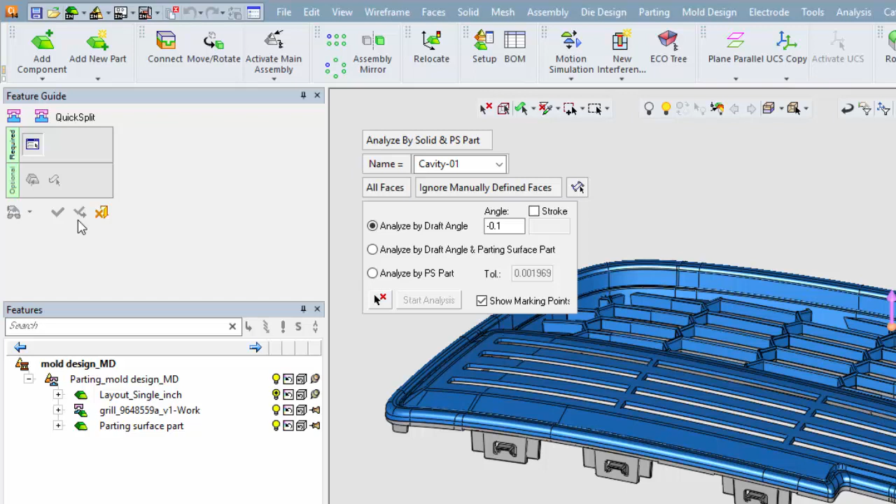Here we will select our first pull direction. We will give it the appropriate name, and then we will pick a face that we know lies within that pull direction. By default, it selects the active Z-positive direction for the pull direction, but we could pick another if we needed it. Now all the faces that it sees in that direction are placed on the cavity.

Here's our first glimpse at the slide bar, which dynamically will separate all the pull directions we create. And please notice the nice clean separation that it makes along parting line.

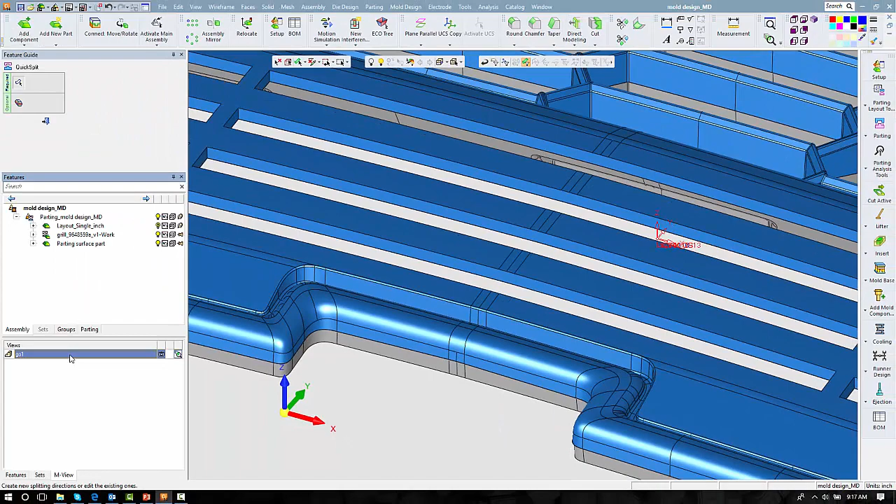Let's now create the core split. We will pick the appropriate name, in this case core, and then we'll tell the system to pick only those faces which have not yet been assigned. Then we pick a single surface that we know faces that pull direction. Now we make sure that our direction vector is pointing in the Z negative direction or the core pull direction.

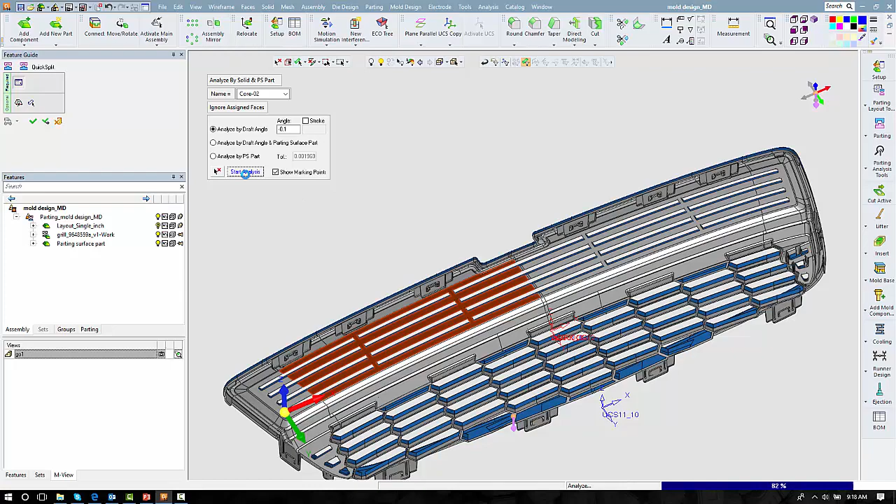So now the core surfaces are identified, and we see in yellow anything that is at least partially undercut or trapped between the two pull directions. We will accept the core faces now. The yellow faces will remain unassigned since they're trapped.

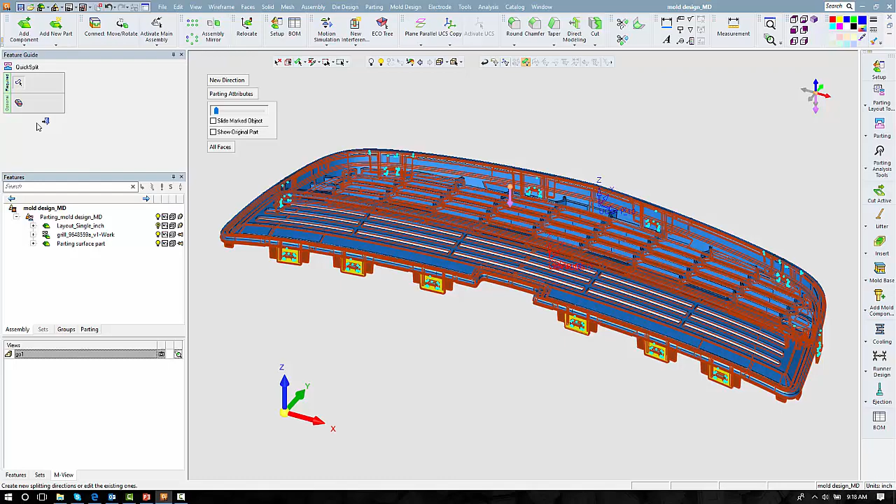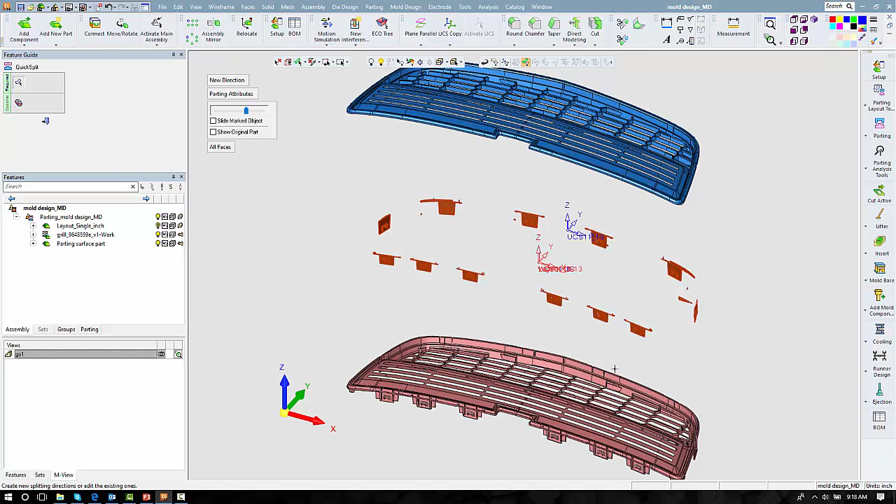And again, using our dynamic sliding bar, we can see, by separating cavity and core, which faces have yet to be assigned. The ability is there to place these remaining unassigned faces on a separate pull direction if we so desire. In this case, we're simply going to attach them manually to the core faces and let the lifters take care of them. And that is done by simply middle mouse clicking over the core faces.

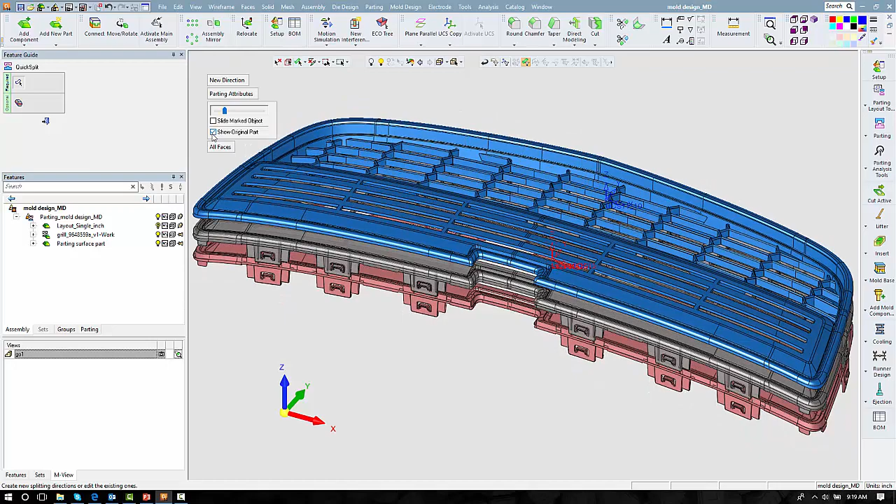Another nice feature is to display the entire part while the different split directions are separated. Another important option to quick split is the ability to analyze faces based upon their draft angle. These draft angles are displayed based upon a range of angles and colors that we can fully customize.

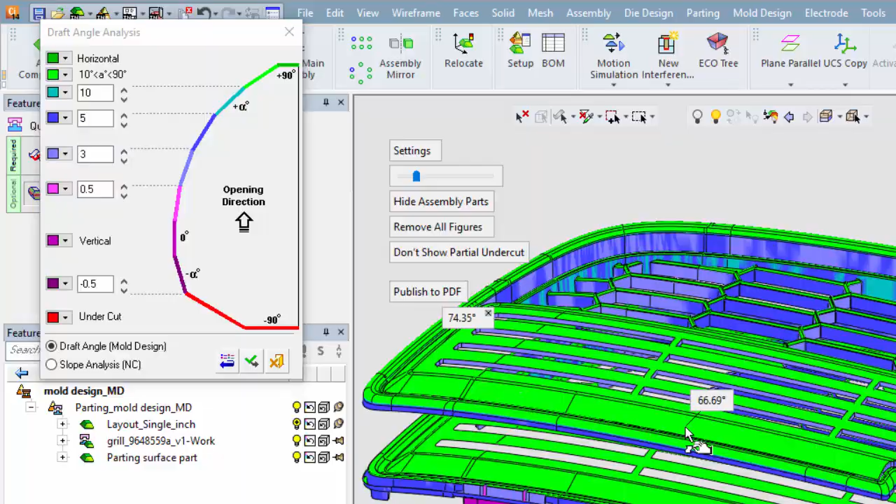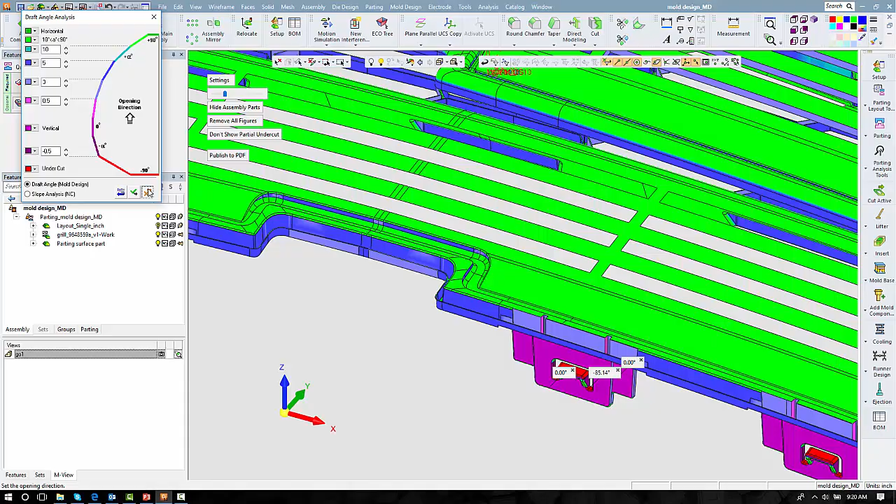Individual features of interest can be tagged so that draft angle value at that location can be seen on screen, and this all the while the part is in its dynamic separation. In this case, vertical walls have been color-coded as violet, whereas anything that's seen undercut or trapped is displayed in red. And finally, this information can be output in a PDF file so that it can be shared with other engineers or with the customer.

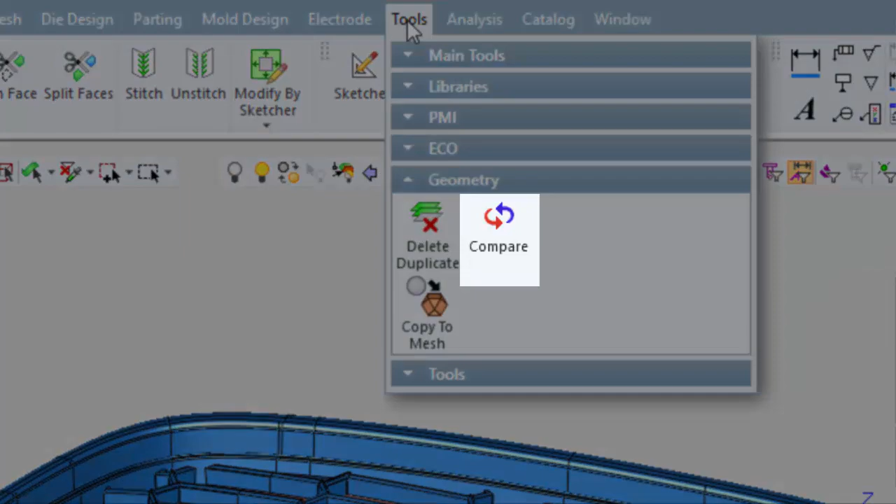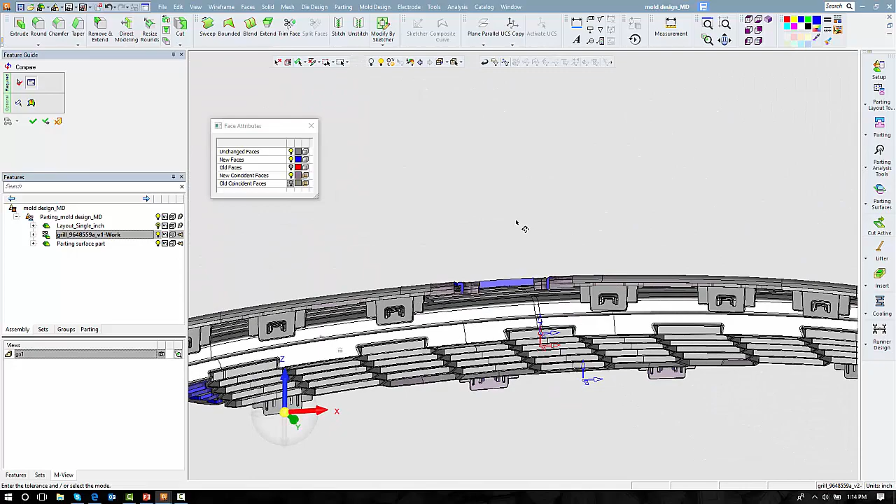Engineering changes are a real part of a mold designer's life. So let's look now at comparing a current design to a new revised level. After we select the new revised version, it will be brought in and overlaid on top of the existing model. A comparison chart now shows features which are changed in the new model, shown in blue, versus the old model, shown in red. Everything that remains the same is displayed in gray.

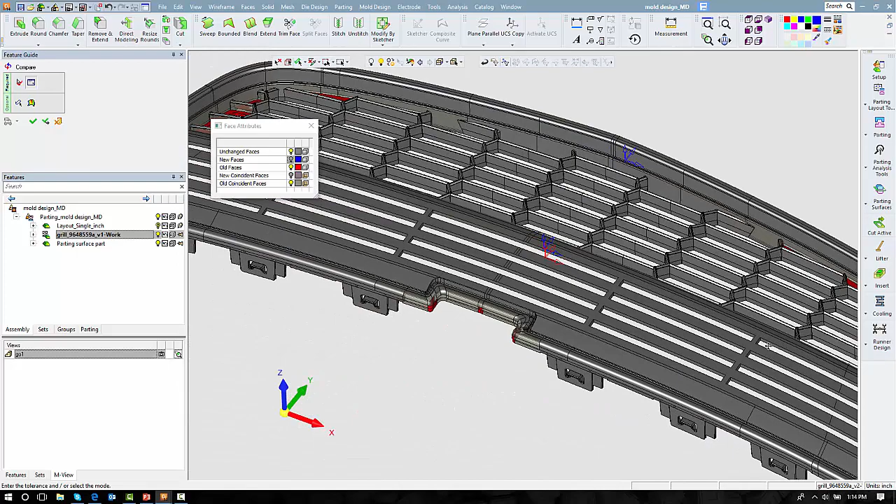Very easily, we can click on and off the different display sets to display the entire new model or old model. So very quickly then, we can see all the changes that have occurred in the design. Not just those changes in the very center front of the part, but also out on each of the far ends.

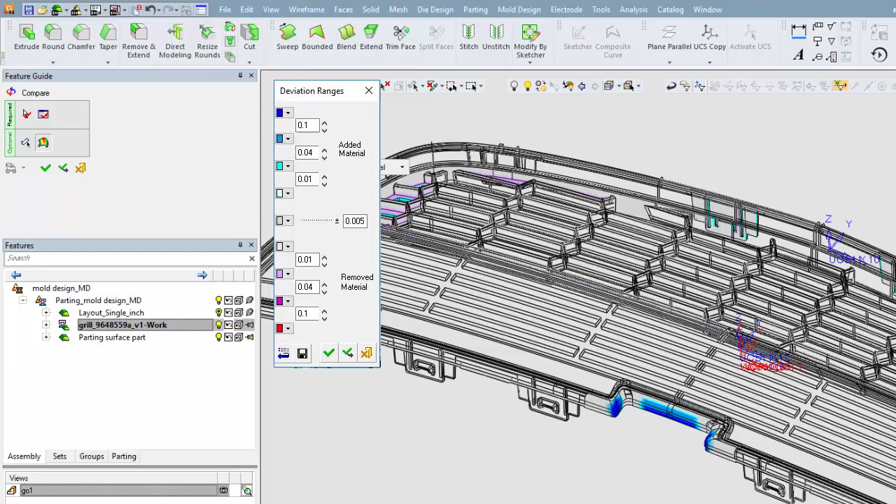In addition to comparing the old and the new model to see what's changed, we can also run a deviation map, which will show us just how much material has been removed or how much it may have been increased. The display to this deviation map can be set to a range of sizes and colors of our choosing. So first, let's set the display to show only those areas where material has been removed. Here we can see clearly how material has been removed from those flat areas.

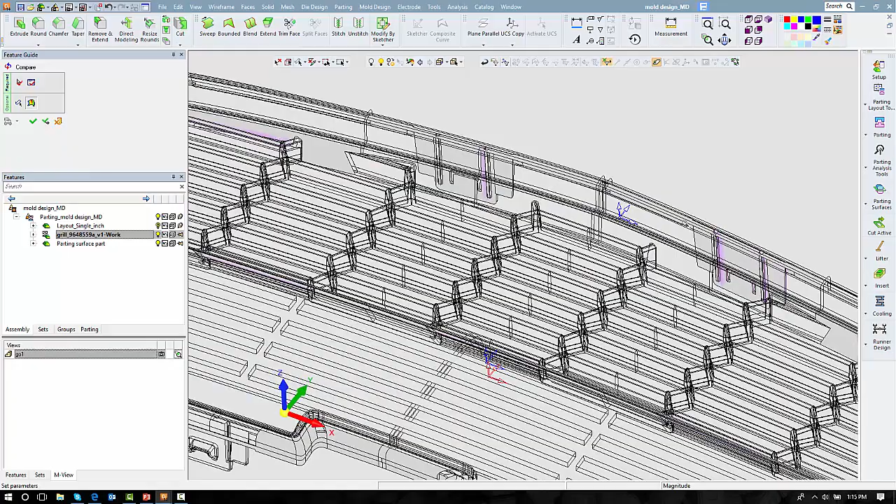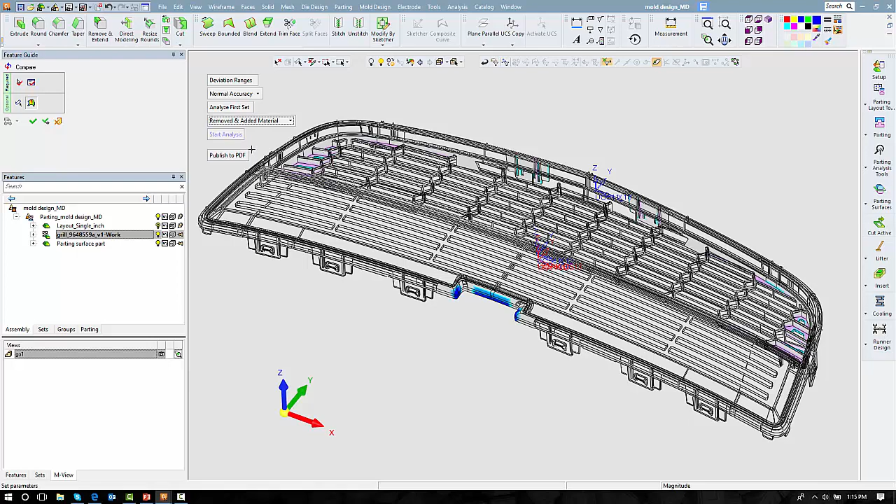Let's set the display now to show the areas where material has been added. And of course, both added and removed areas can be shown together. As is the case with the other analysis tools, all this information can be published to a PDF file where again it can be shared with other engineers or discussed over with the customer.

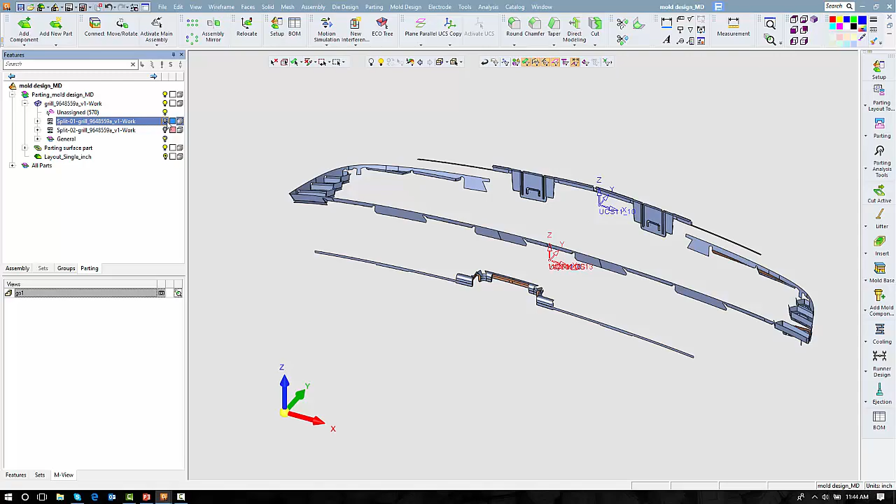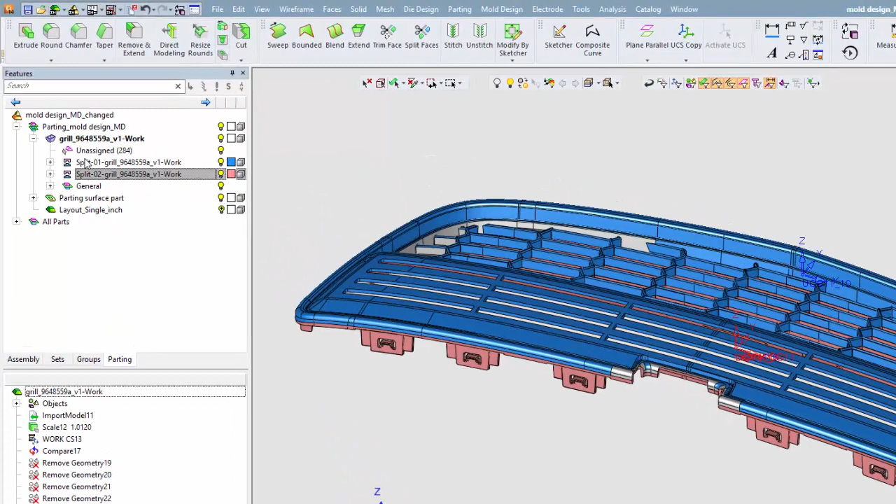So now after running the comparison, we have faces that are not assigned to either the cavity or the core side. So to remedy this, we will first stitch these new faces into the existing model. From here then, it's just a matter of rerunning the quick split directions. To do that, we'll right-click on the split direction, in this case the cavity side, and say Edit Direction.

We want to keep the same pull direction that we used before, in this case Z positive, but we'll have the system now look back through all these faces again and then recalculate what it sees in that pull direction. And then of course we will do the exact same thing with the core direction.

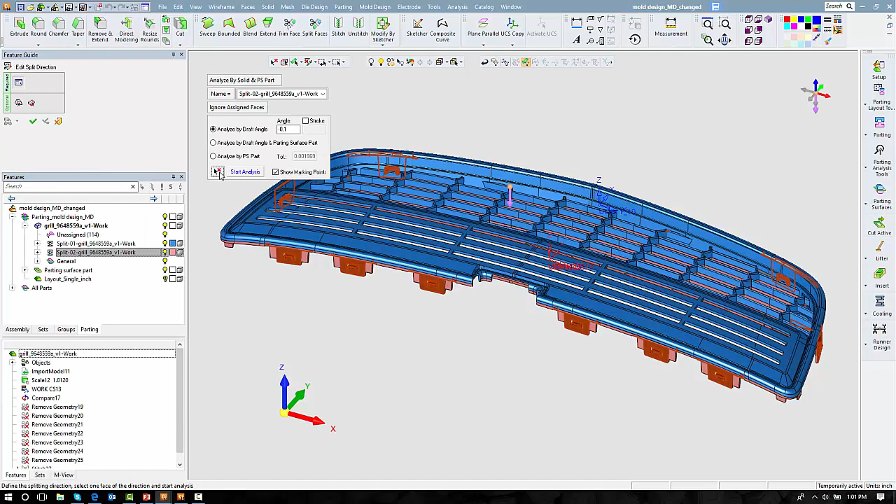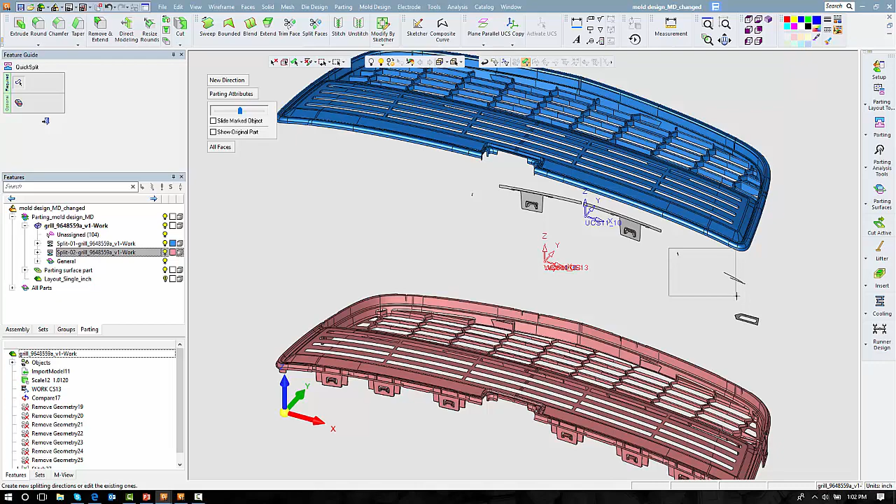Some of these new faces, like the faces from before, may be trapped or undercut, so we'll just simply manually assign them to the cavity or the core side. To do that, we'll select the faces and then middle mouse drop them on the pull direction we wish to assign them to.

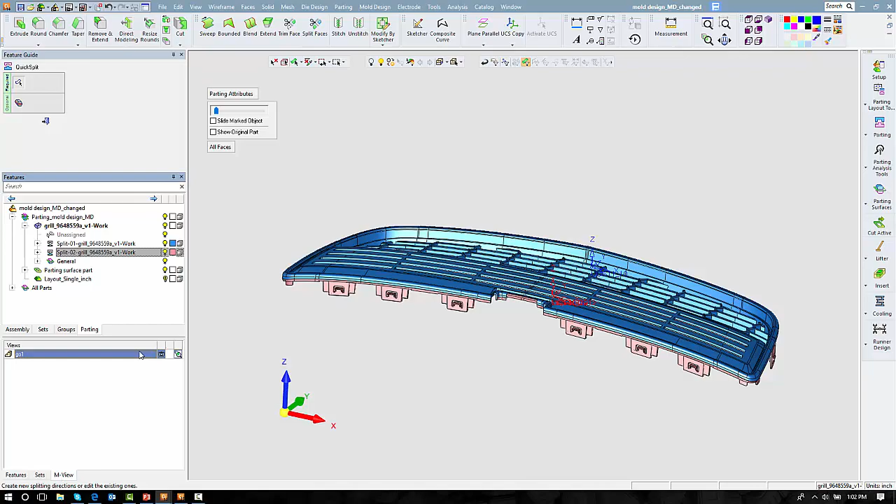And with that, we've incorporated the engineering change into our design. These exact steps can be done at any time during the mold design process, even after the full cavity and core block separation.